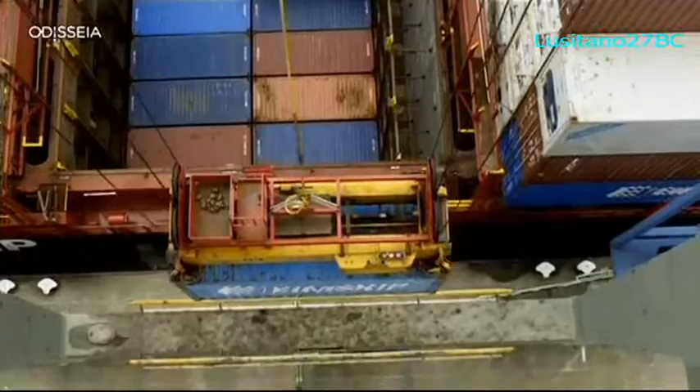Every day, tens of thousands of containers are unloaded in Europe's busiest ports. Millions of tons of freight, which will flood all over the continent. But the transport of all this cargo has always come up against an almost impassable barrier, situated in the very heart of Europe, the Alps.

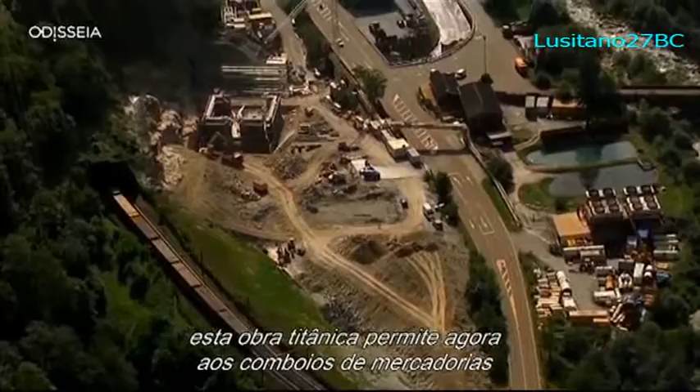An obstacle finally overcome thanks to the construction of a brand new rail tunnel some 57 kilometers long, the longest tunnel ever to be built in the world. Dug beneath the Gotthard Massif, this titanic miracle of engineering now allows freight trains to pass through the Alps at 160 kilometers per hour in barely 20 minutes. And passenger trains go even faster at 200 kilometers per hour. It's as if we demolished the Alps.

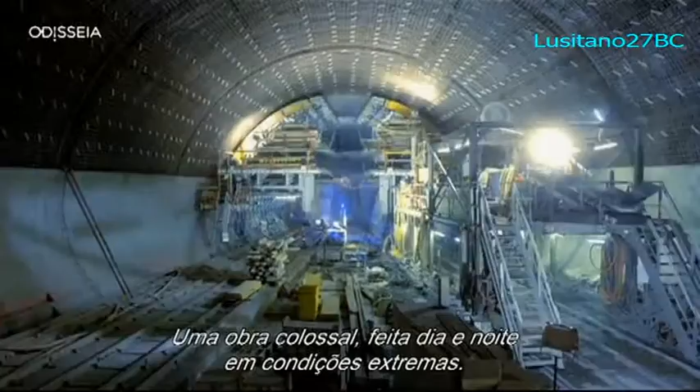Construction workers, engineers, surveyors. This enormous project mobilized 6,000 men and women for 20 years and required ultra-complex boring techniques. We had to attack 5 points at the same time. The Channel Tunnel is nothing next to this. A colossal task carried out 24/7 in extreme conditions. The rock gets very hot. When you touch it, it's at 50 degrees. We're going to tell you how man achieved this crazy dream of defeating the biggest natural barrier in Europe.

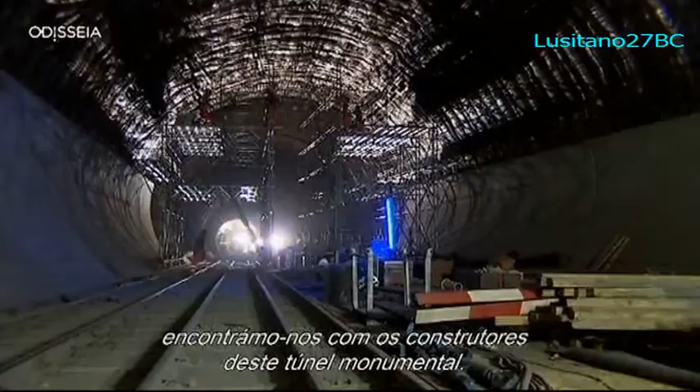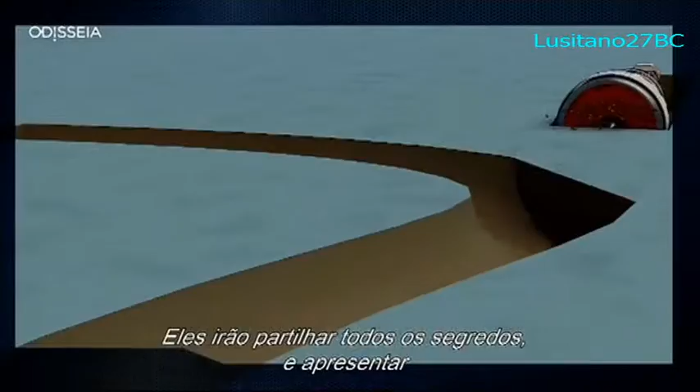This tunnel overcame countless challenges. To bring this exceptional adventure to life, we met those who constructed this monumental tunnel. Civil engineers like Davide Fabri and Werner Kradolfer. Head surveyor Adrien Rief. Head of all rail engineering Nicola Steinman. And the CEO of the main construction company, Renzo Simoni. They'll share all the secrets and present the ultra-modern means that were needed to achieve this incredible feat.

We'll also reveal the mind-boggling difficulties the engineers were faced with. At some points in the tunnel, we measured wind speeds of up to 350 kilometers per hour. Some of the terrifying incidents which threatened the site. How did we get out? We had to dig a lateral tunnel going backwards and using explosives. And the unrivaled safety measures which had to be deployed to prevent the dream from turning into a nightmare. There's a risk of derailing, especially at speeds of over 200 kilometers per hour.

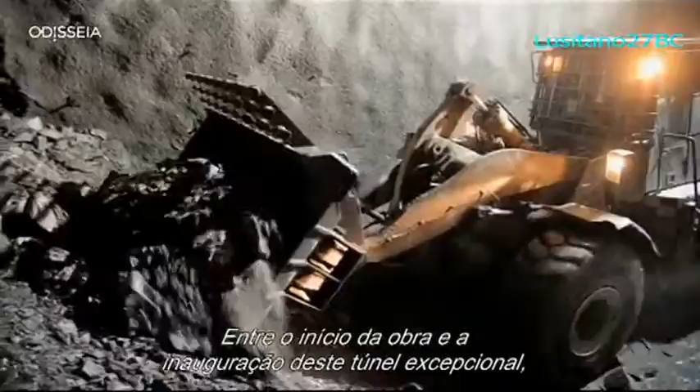Between the start of the work and the inauguration of this record-breaking tunnel, 20 years of hard labor were necessary to finally make history. Then we could finally announce it. We've done it. The 57-kilometer tunnel into the Alps has become a reality. You'll see how in the 21st century this outsized tunnel has changed one of the main trade routes of the old continent forever.

The Alps, Europe's highest mountain range, covering 60% of Switzerland. A natural barrier which for a long time held man back, until he had acquired the technology to break it. A symbol of our constant fight to tame nature, the Gotthard Massif, situated in the very heart of the Alps. Gotthard has always been a part of a Swiss legend. You can almost say Switzerland was born from this legend. But Gotthard was previously an obstacle and a source of danger. And over the centuries, we've managed to go over and under it by building transport links between north and south.

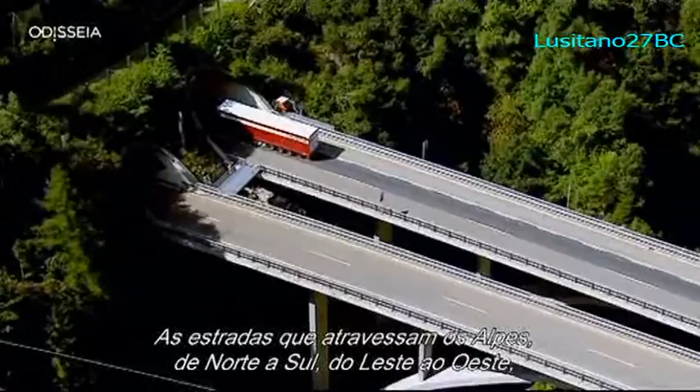The gradual development of the Massif with more and more modern infrastructures has always been crucial to Switzerland. The roads which crisscross the Alps north to south, east to west, are the country's economic arteries. With over 25 million tons of merchandise in transit every year, it's even one of the most frequented trade routes in Europe. Having thousands of trucks on their roads was pure hell for the Swiss. The ecosystem needed to be protected, and the Swiss simply had to find a solution.

The Swiss transport authorities established the policy of transferring truck-hauled freight to rail freight. To do that, existing rail network capacities needed to be increased. The aim of the policy was to protect alpine flora and fauna, but also the inhabitants, who were suffering from increasing noise and exhaust pollution.

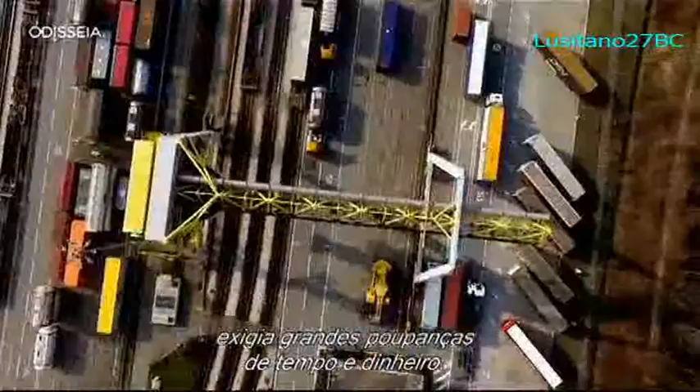But developing rail freight in favor of road freight was a huge gamble. To convince a hauler to unload his goods onto a freight car only to reload them farther down the line would require big savings in both time and money. A tunnel works for everything. Well, works for freight, also works for passengers. And they knew passenger transport would increase.

Switzerland's government already had the solution. In 1882, Swiss engineers had already bored a first rail tunnel under the Gotthard Massif. Lying at an altitude of over 1,100 meters and 15 kilometers long, it was the largest tunnel ever constructed. The first Gotthard rail tunnel broke all records back then.

Today, 15 kilometers is nothing. But this was the late 19th century, and it was dug with pickaxes and sweat. They used dynamite, recently invented by Nobel, so the Swiss used very recent, very innovative technology to bore the tunnel.

The tunnel started high up in the Massif and obliged trains to zigzag their way up at slow speeds. So the idea was, if the tunnel were bored at the base, it would be totally straight and ideal for high-speed trains. The project was titanic. The chosen line would require boring through 57 kilometers of rock, the equivalent of crossing Paris 3 times from east to west.

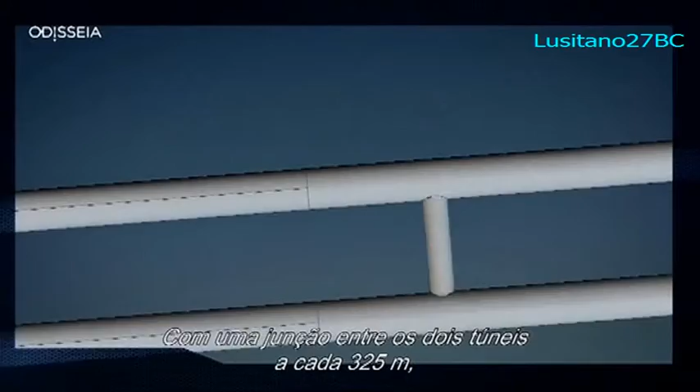This tunnel overcame countless challenges. It was an extraordinary sight and probably one of the most complex pieces of engineering in the world. Especially as the engineers soon realized there would need to be 2 tunnels, one for each direction. With the addition of a junction between the 2 tubes every 325 meters, a total of 152 kilometers would have to be dug.

If I had put the rail tracks in both directions in a single tunnel, I'd have had a tube much too wide to support such geological conditions at such a depth. The wider the tube, the more fragile it is. So the problems multiplied, starting with the risk of the structure caving in on itself. So we went for a project with 2 tubes, with a reduced width, to reduce the risks.

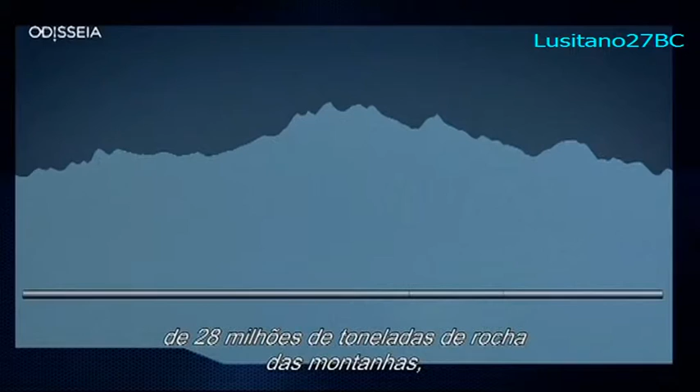Concretely, that would mean extracting 28 million tons of rock from the inside of the mountains, the equivalent of 5 great pyramids of Cheops. A figure that makes the head spin. And the second tunnel would be even harder to access, as it would pass at some 2,300 meters beneath the highest summit of the Massif. At any given moment, any given element can become extremely dangerous.

And as difficulties often come in pairs, the engineers knew that they couldn't bore in a straight line. Some zones had to be bypassed to avoid causing a disaster. You're passing through the Alps, so there's geological layer after geological layer, which is a real conundrum for the geologists and the engineer who wants to dig a tunnel there.

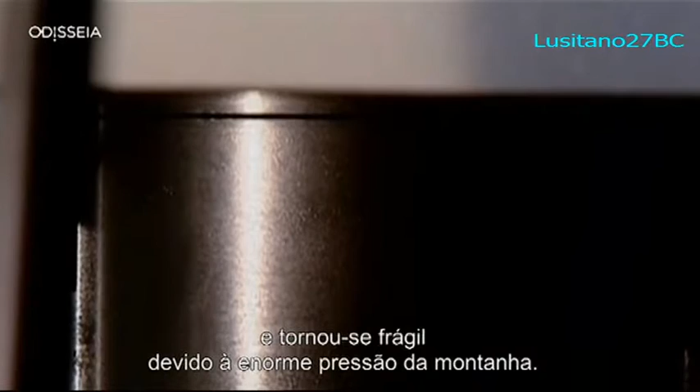There are some parts of the massif where the rock is homogeneous, hard and solid, and others which are much trickier, where the rock has been modified and made fragile by the huge pressure from the mountain. In those areas, it's flakier, less resistant, and sometimes even pulverized. The first question was, will we be able to probe? If so, what will we find? And will it be possible to bore through ground with so many layers?

Another difficulty was that the new tunnel would pass close to 3 hydroelectric dams. A nightmare for the technicians, when you know that water seepage is one of the worst dangers and could threaten the structure of a tunnel. We knew we had to be careful because the dams were above or adjacent to the route, and there would be subsidence. There was a risk of the dam giving way and causing a disaster. For absolute safety's sake, we took ultra-precise measurements over 15 years.

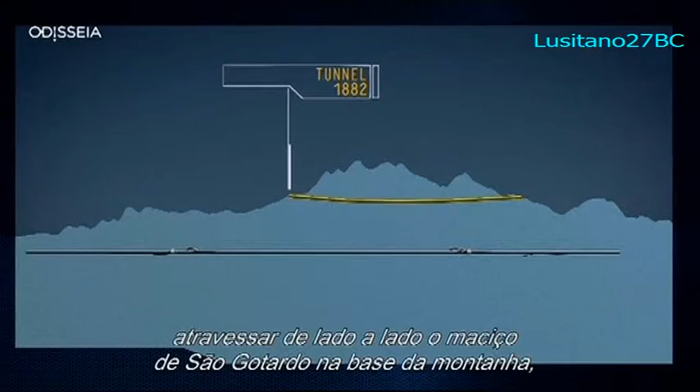Here's the tunnel constructed in 1882. Since the aim of the new tunnel was to cross the Gotthard Massif from one side to the other at the base of the mountain, it was named the Base Tunnel. Engineers, construction workers, surveyors, almost 6,000 men and women were mobilized every day on this mammoth site for 20 years.

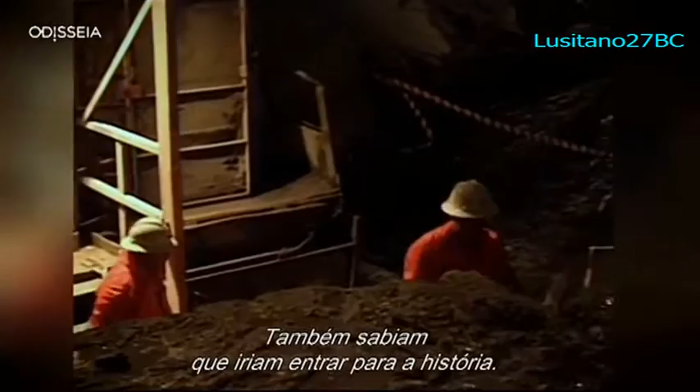Work began in 1996. Step 1, to dig an 800-meter deep access shaft to enable the laborers to work in both directions of the tunnel. From the outset, the whole team knew it would be a long-term job, that it would be extremely difficult, and that they were faced with a huge challenge. They were also aware that they would be writing a new page in history, but there would be lots of hard work first.

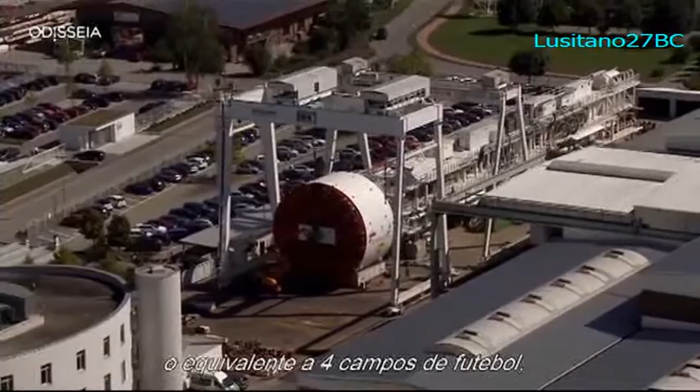An outsized project like this would require exceptional machines, specially designed to meet this incredible challenge. The job of this machine was to bore through the mountain. Over 450 meters long, the equivalent of 4 football fields, this huge state-of-the-art cylinder is a tunnel boring machine, or TBM. It's hard to imagine the power and weight of this amazing machine. It weighs 3,000 tons. It's monumental, gigantic, simply awesome.

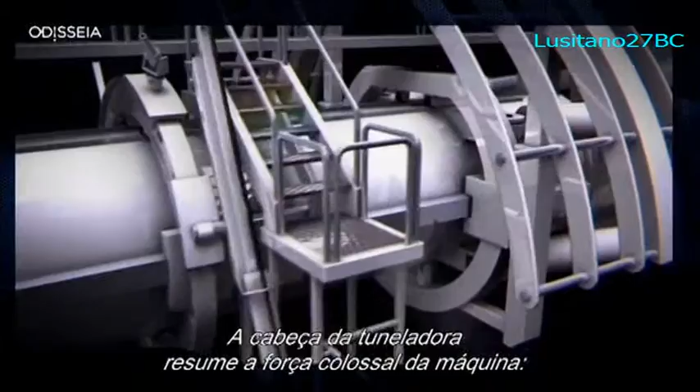The head alone sums up the colossal power of the machine. With a diameter of 9.5 meters, the equivalent of a 3-story building, it's equipped with 58 cutting wheels. Each of them exerts a pressure of 32 tons on the rock, gradually pulverizing it as it turns. The pieces of crushed rock which are extracted are called chips.

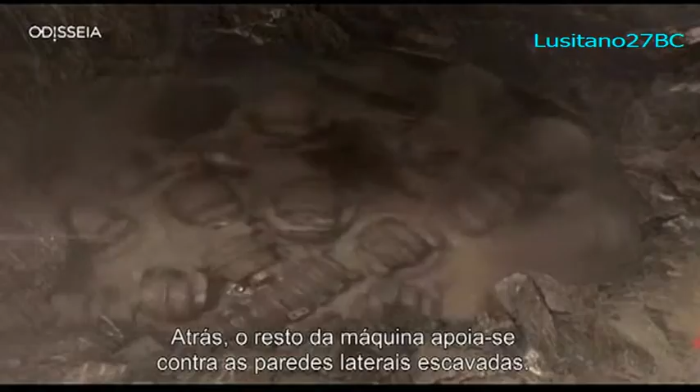The TBM has 2 parts. The head, with the cutting wheels that break up the rock as it bores through. And behind, the rest of the machine has grippers which push against the newly dug walls to provide very powerful forward thrust.

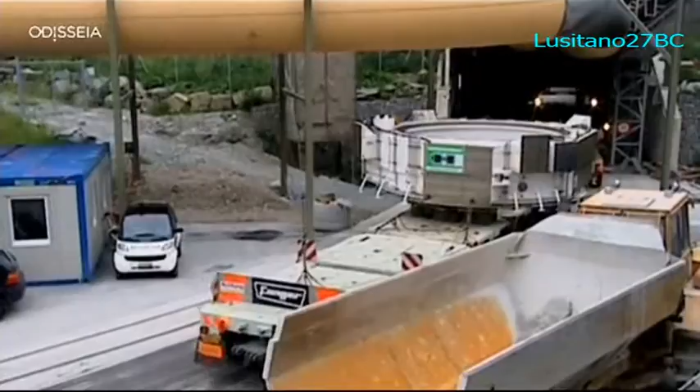This steel monster produces 42,000 kilowatts of power and can extract up to 6,000 tons of rock each day. It's not a new concept. A similar TBM was used to dig the Channel Tunnel, but it was the first time one had been used on such an extreme site. This time, the stakes were even higher. So to meet the deadlines, without going above the 10 billion euro budget, the engineers decided to use not one, but several TBMs.

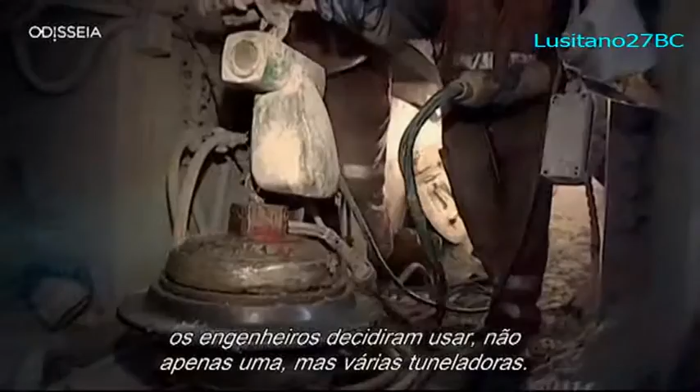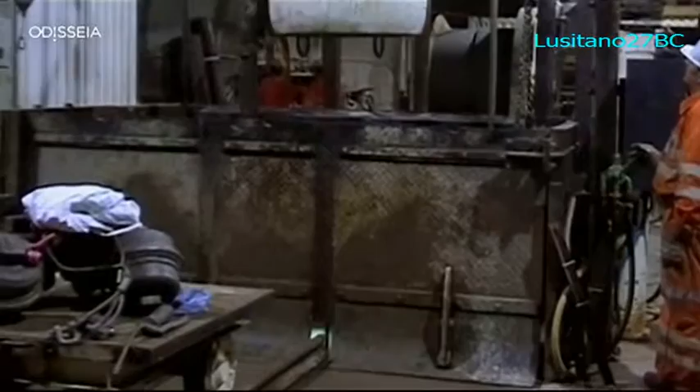To dig such a long tunnel with reasonable deadlines, we had to attack 5 points at the same time and via a shaft some 800 meters deep. There were 5 bids for tender won by 5 different consortiums. Each of them was attributed with a section where they had to work at the same time as the others. But by deciding to split up the tunneling work, the engineers simply multiplied the risks of breakdowns and thus delays. And as you'll soon see, despite the thousands of hours of simulations and calculations, hazards on such a site are inevitable.

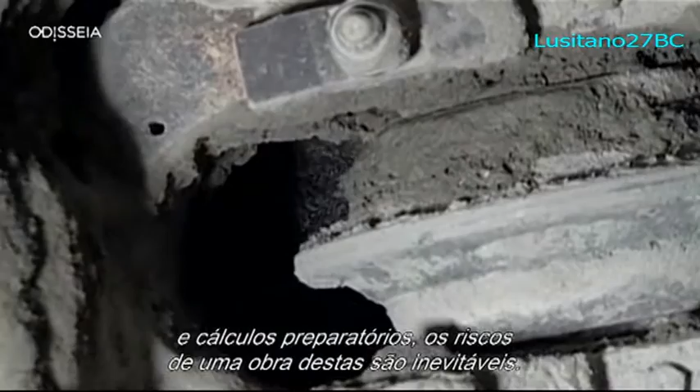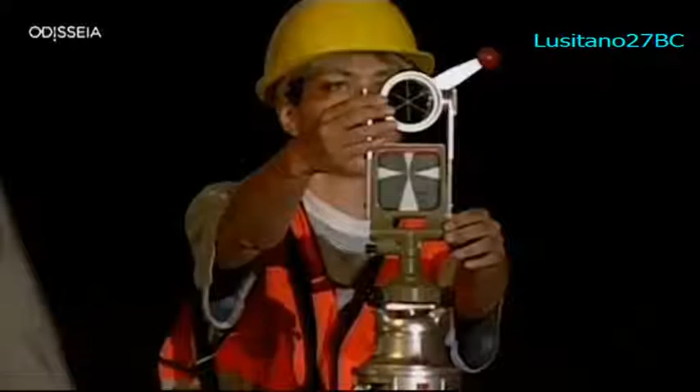Meanwhile, the consequence of this division of labor was the pressure placed on the shoulders of the surveyors. The role of the surveyors was vital. As the tunnel was attacked at several points, the 2 tubes needed to come together with absolute precision. The slightest error would have spelled disaster. We'd have done all that digging for nothing. So the surveyors stepped in with their measuring tools, mostly equipped with lasers, and took extremely precise measurements for the directions the TBMs needed to take.

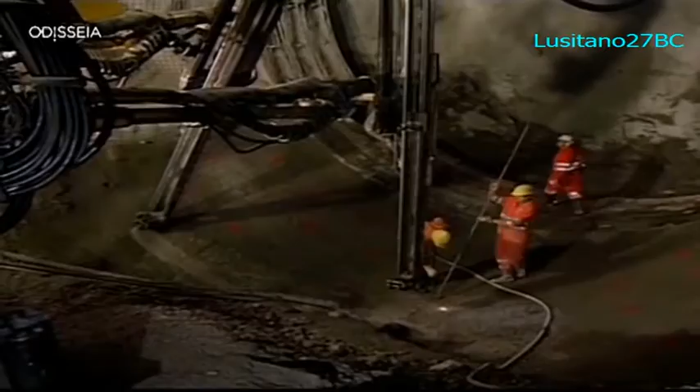The danger was very real. With each contractor working on its own section, how could the teams be certain that the 5 different stretches of the tunnel would be perfectly aligned at the end? The very slightest of offsets at the start of a stretch could result in a discrepancy of several meters at the other end. A disaster for such a huge project. So the surveyors were constantly on the alert. Their mission? To ensure that the route of the tunnel and the diameter of the borehole were strictly respected.

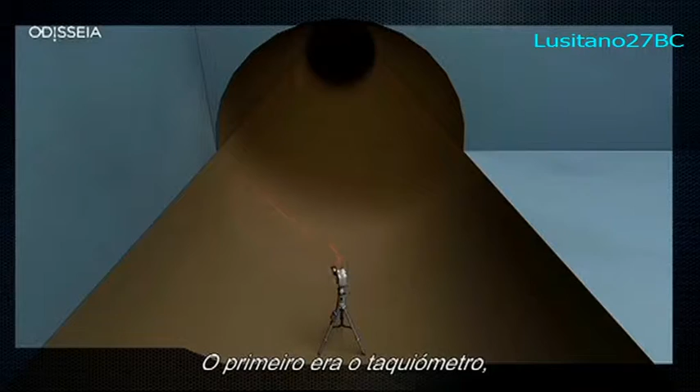The surveyors were equipped with 2 tools of formidable precision. The first was the tachymeter for measuring the angles and distances of the tube by projecting a laser beam onto the walls. There are 2 very important instruments, the tachymeter for long tunnels and the gyroscope. The particular thing about long tunnels is you must regularly check the trajectory and adjust it every time, and that's what the gyroscope's for. In expert hands, these 2 instruments would enable the surveyors not to exceed the accepted margin of error, a minuscule 25 centimeters, less than the height of a sheet of A4 paper, an amazing feat for a 57-kilometer-long tunnel.

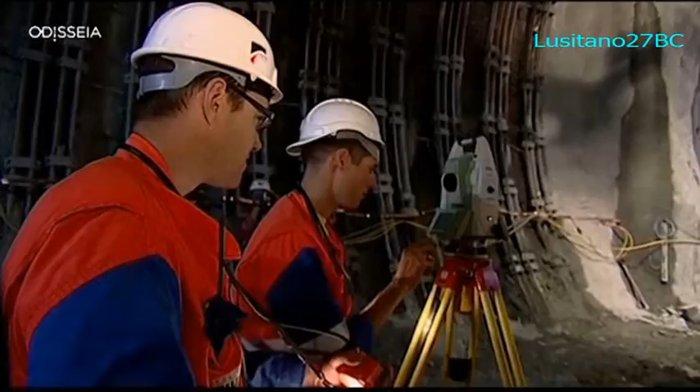But the borehole was far from being the only headache that the project designers had to overcome. The other major challenge of this record-breaking tunnel was the strength of the structure. And in this area, the risks are directly proportional to the huge scale of the project. Rule number 1 is, the moment you've finished boring a small section of tunnel, you immediately consolidate it so that it doesn't cave in. Back to the early 2000s, the tunnel was advancing rapidly. As the TBMs continued to bore their way through the mountain in 2 directions, workers specialized in tunnel consolidation stepped in.

To understand what was at stake during this next stage, you must bear in mind a simple principle: nature hates emptiness. Digging a cavity as deep as this, up to 2,300 meters deep, changes the balance of forces beneath the mountain. Rock tends to naturally cave in on itself to fill the void, the biggest fear of the engineers. We had to consolidate the walls and roof without reducing the diameter required for the passing of a high-speed train. That was the big challenge. We had to find the right balance between strength and effectiveness, because the tunnel is planned to last for at least a century.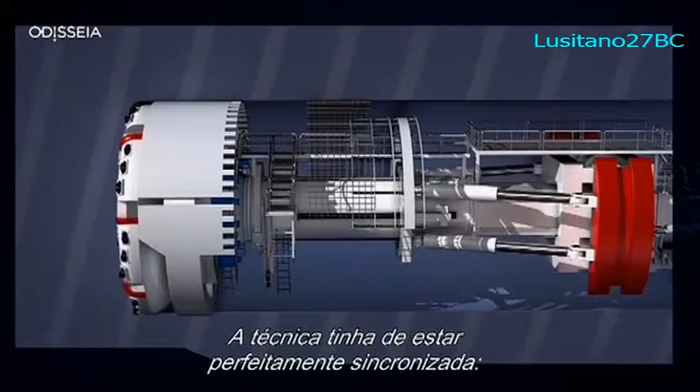The technique had to be perfectly synchronized. The consolidation of the walls and roof had to advance at the same speed as the boring of the gallery. This was true regarding the safety of the crews, of course, but also for that of the entire edifice. After boring, we had to cover the walls and roof with concrete to support the rock and prevent it from caving in on the TBM. We added anchors in the rock to prevent any cracked blocks from falling. The layer of concrete was reinforced with extra strong mesh, which serves to rigidify the ensemble. If needed, we would add extra, thicker, longer, and more resistant anchors.

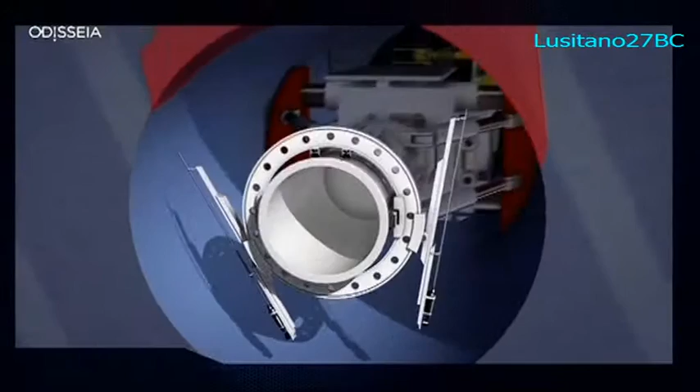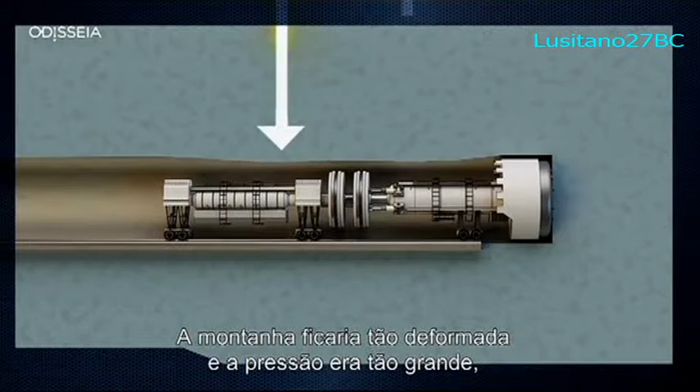The anchors are huge bolts screwed as deeply as possible into the rock. But at more critical points, where the pressure was particularly high, there weren't enough to guarantee the safety of the tunnel. The mountain was being deformed to such an extent, and the pressure was so strong that the underpinning alone wouldn't have provided enough resistance.

So the trick was to allow a small amount of pressure to exert itself so as to reduce its impact on the walls and roof. So the hull had to be able to deform slightly to absorb the pressure. That's the principle behind digging such a large tunnel. This huge length of suspended steel, it's known as a flexible girder. As its name suggests, it's designed to deform under the effects of strong pressure.

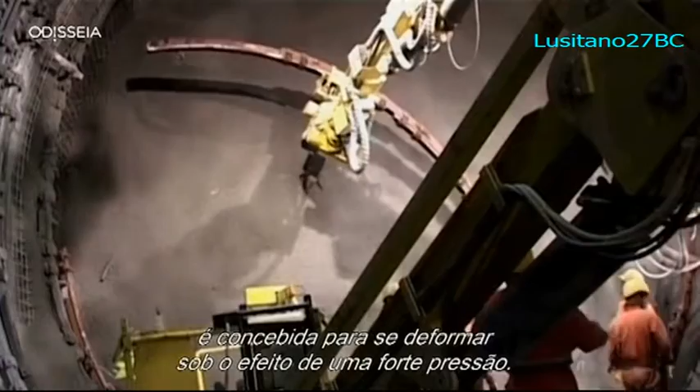The idea was to place thousands of them around the walls, roof and floor at places most threatened by strong pressure, by joining them together one after the other to create steel strapping for the tube. Once fixed together, the steel straps would slide to a stopping point. Then they began to slowly deform until we decided to block them at the stopping point. By blocking the deformation of the steel straps, we created resistance around the tube.

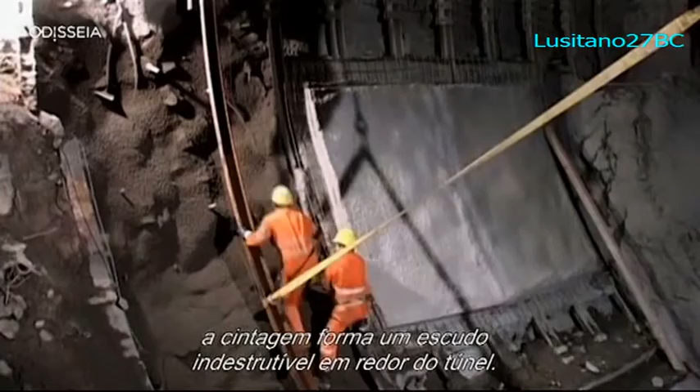The biggest difficulty was finding the right stopping point and then stabilizing the steel straps. And always bearing in mind that over-deformation would modify the profile of the tunnel, which could then prevent trains from getting through. Along with the hull and reinforced concrete, this strapping forms an indestructible shield around the tube. One major question remained. Where do you find hundreds of thousands of cubic meters of concrete needed to make the shield?

Remember that each of the 4 TBMs used on the site can extract up to 6,000 cubic meters of rock every day, the famous chips, which turned out to be providential material for the engineers. What do you do with 28 million tons of excavated rock? Imagine a 2-lane highway lined with concrete mixer trucks coming from the north of Europe down to the south, non-stop. Then they had a fantastic idea. They'd use a lot of the rock to make their own concrete for the tunnel surfaces.

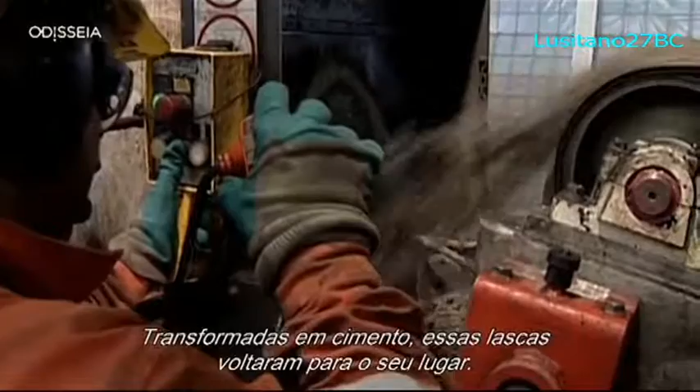In fact, the rock would serve as the base material for the production of the cement used in making reinforced concrete. That's why we installed giant crushing and grinding machines at the tunnel entrances. Once turned into cement, the chips returned to where they came from, deep inside the tunnel. Thanks to this ingenious technique, 40% of chips extracted from the gallery were recycled in order to make the walls and roof safe. The remaining 60% were dumped in old abandoned quarries. Several million cubic meters even made vacationers happy when it was used to build artificial islands at a Swiss lake resort.

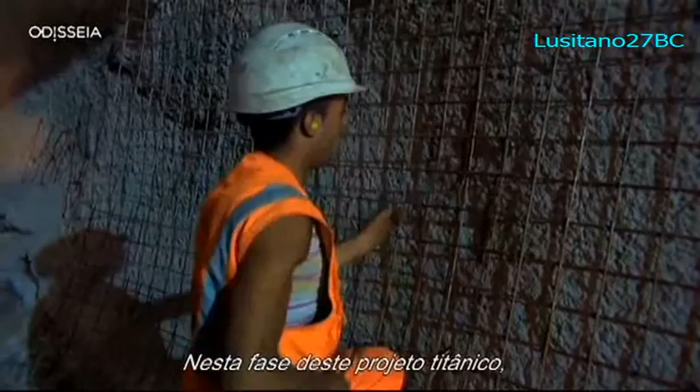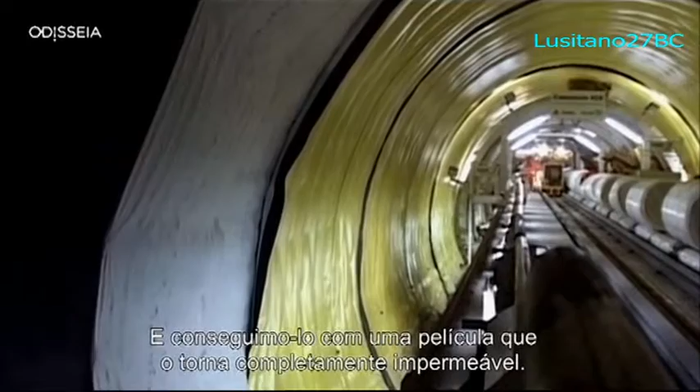At this stage of the titanic project, you might believe that the 2 57-kilometer-long tubes and their junctions were now completely out of danger. But that's without counting on one final threat, and probably the most dangerous of all, water seepage. Water is enemy number 1 in tunneling because it can cause so much damage, so it's absolutely vital to prevent water seeping into the tunnel. We needed to construct a totally waterproof tube, and we achieved this with a film that would coat the tube, making it completely waterproof.

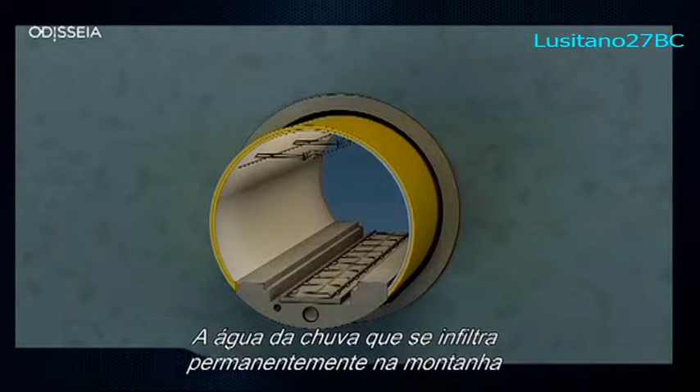The system is based on a plastic waterproof film that's only a few millimeters thick. We had a massive roll of the waterproof film, which we unrolled around the roof and walls, and then welded it together at certain predefined points. Here is an animation of this famous waterproof film. Rainwater that constantly seeps down through the mountain collects on either side of the tunnel walls. If nothing is done to prevent this, here's what might happen. The pressure would continue to grow until the tunnel explodes under its weight.

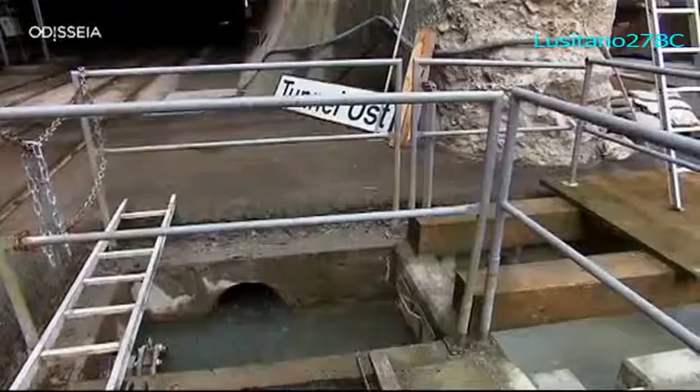The solution? To lay at the base of the tube drainage pipes to evacuate the water towards the outside. Drainage pipes were laid along the whole length of the tunnel floor to collect seepage and to gradually evacuate it to a central collector in the middle of each tube. This water is then redirected to the mouths of each tube. Once collected, the water is left to flow back into nature. The natural seepage of water down through the mountain would actually be the cause of one of the biggest material accidents of this extraordinary construction site.

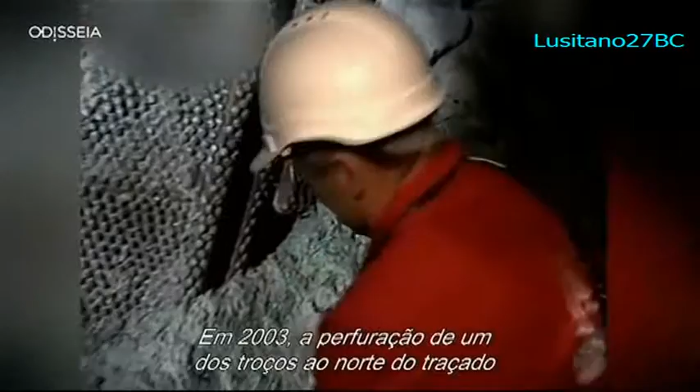Despite the number of probes carried out to test the quality of the rock, nasty surprises are inevitable over such a distance. In 2003, the boring of one of the stretches in the northern section brutally came to a halt. The TBM advanced into a zone of soft rock, which crumbled as the cutting wheel came into contact with it. The rock collapsed and totally buried the machine. Impossible to move it, impossible to reverse. Work could have been held up for months, years, or even been abandoned.

Over the centuries, water seepage from rain and melting snow had ended up totally damaging this vein of rock, which the probes had failed to detect. The amazing idea they came up with was to build a bypass tunnel so they could reach the machine from the other side. Once on the other side, we were able to clear the flakiest rock, consolidate the walls and roof, then free up the TBM so it could get on with its work.

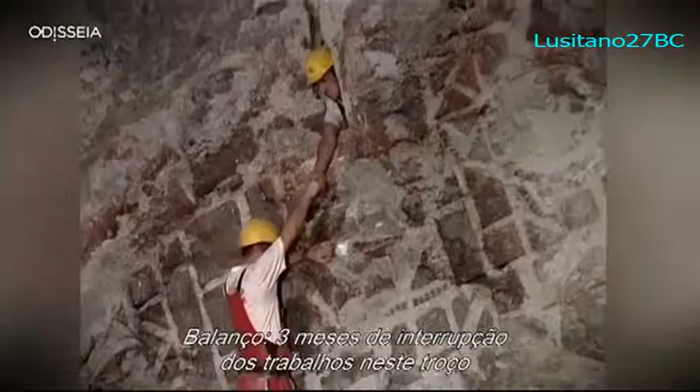It was science and technology against the elements, which are often really against you. The result? A 3-month interruption of work on this stretch at an extra cost of several million dollars. Incidents like that are a disaster for a construction site because you lose a lot of time. You risk not meeting the deadline, and it's very costly. Unforeseen incidents like this were testing and exhausting for the crews who were already working around the clock, 7 days a week, in particularly harsh conditions.

Contrary to preconceived ideas, the temperature is far from cool and far from constant under several thousand meters of rock. There's a very simple law of physics. When there's pressure, temperature rises. So when you're in the heart of the mountain with thousands and thousands of tons of rock pushing down from above you, the rock gets very hot. When you touch it, it's at 50 degrees. So one of the challenges we had to meet was to install a ventilation and cooling system to guarantee good air quality with temperature and humidity levels that were bearable.

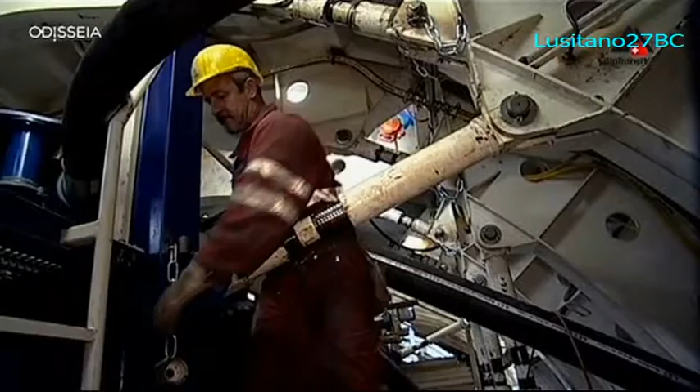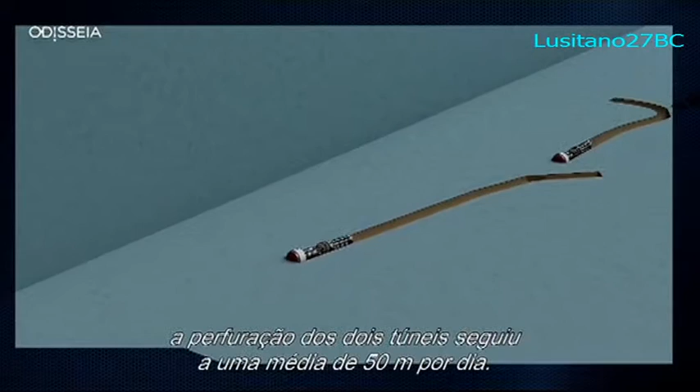On-site safety was a crucial point. The maximum temperature should not have risen above 28 degrees. And the levels of carbon monoxide and several other gases were constantly monitored. Thanks to all these technical and technological innovations, the boring of the two tubes continued at an average rate of 50 meters a day.

The construction site of the century, as it was called by the media, was about to enter its crucial stage. The 1,800 workers and technicians who had been boring through the mountain for 14 years would soon realize what kind of feat they had accomplished. The big day was set for October 15th, 2010. In a few moments, before the expecting eyes of the teams, the two eastern stretches are finally about to be joined. The whole gallery shakes. The TBM is close, when suddenly, it's done. The two sections have finally become a single tube.

An immense moment of pride and joy for the thousands of men and women who had been working for over 8 years deep in the entrails of the Gotthard Massif. They'd just written a new page in the history of mankind. It was incredibly emotional for the whole team. They felt they'd defeated the mountain. They'd been incredible, and they were experiencing something extraordinary, unforgettable. Huge emotions for all on the team, and a great victory for science and technology.

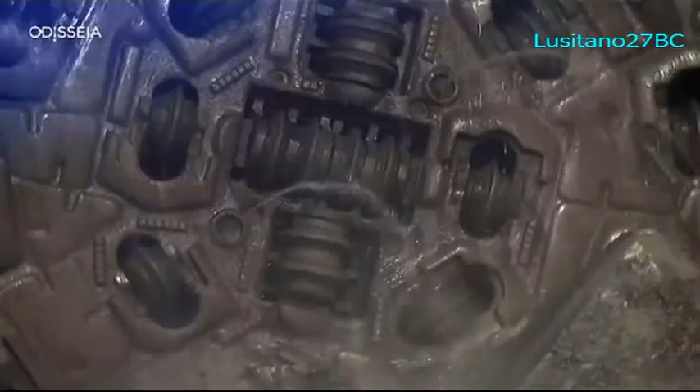5 months later, it was the turn of the western tube. Both rail traffic directions were now open. Then we could finally announce it. We've done it. The 57-kilometer tunnel under the Alps has become a reality. Construction workers, foremen, and engineers had all just accomplished a feat unprecedented anywhere on Earth. Remember, the accepted margin of error for each section was a tiny 25 centimeters. On arrival, the discrepancy was a mere 13.8 centimeters. A level of precision on such a mammoth work of engineering that's hard to believe.

But work was far from complete. Once the two tubes were joined, another challenge began. The aim of this project wasn't to drill some holes through a mountain just to prove it was possible. It was to build a railway and put it into service.

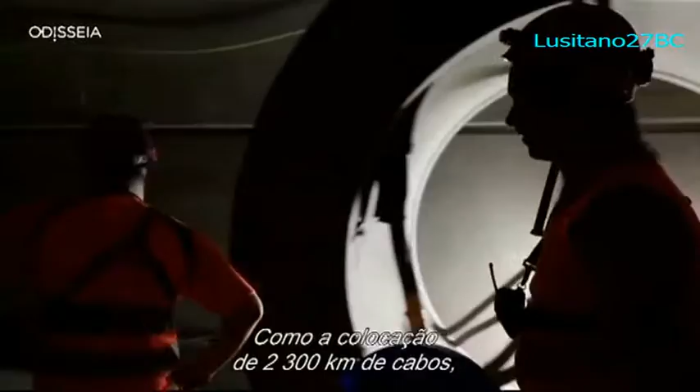While constructing a rail line in the open air seems like child's play, doing it inside a tunnel is a wholly different ballgame. And once again, the difficulties were directly proportional to the scale of the work. The longer the tunnel, the more expensive it is, and the greater the number of risks of malfunctions. And to make things even harder, the narrowness of the tubes also generated specific problems, such as laying 2,300 kilometers of cables, which equip the tunnel right into the heart of the mountain.

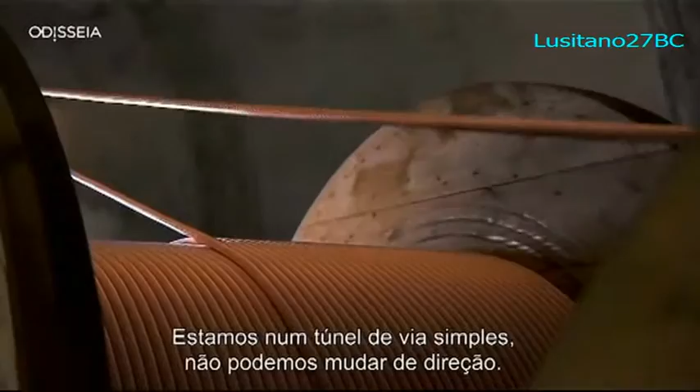We were in a single-track tunnel, so vehicles couldn't turn around to change direction. So we had to adapt the laying method. And the vehicles transporting the cables were fitted with cabs at both ends, so that they could switch and reverse in both directions. The laying of the track for the future trains also required a whole host of innovations, without which the project would never have been achievable.

Another major enemy in a tunnel is dust. Outdoors, the wind disperses it. But in a tunnel, you need to make sure there's as little dust as possible. Like water, dust gets in everywhere and acts like sandpaper on all the connections and fixtures that rub together, not to mention safety problems linked to the lack of visibility.

No one likes dust in their own home. It's the same in the Gotthard base tunnel, where we try to minimize dust. Ballast, the crushed stone laid between the tracks to bear the load of trains, produces a surprising amount of dust. So they had to find a solution for such a long tunnel.

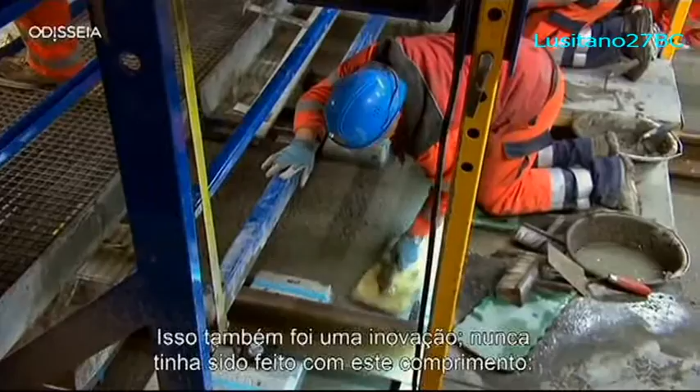The solution? To set the track on a huge concrete slab running the full length of each tube. A very tricky operation that required careful orchestration. This too was another innovation. It had never been done over such a length, replacing crushed stone with concrete.

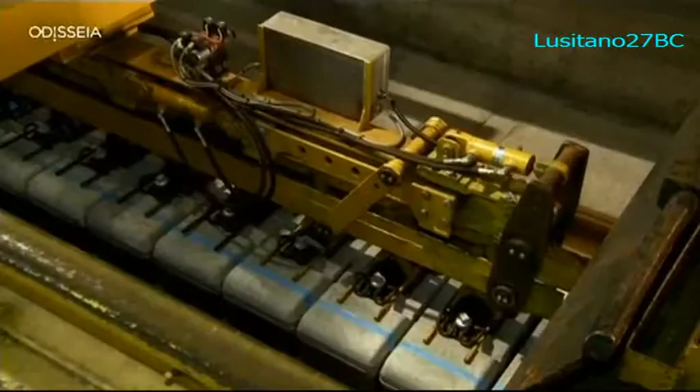Step 1. To lay, then weld 120-meter-long rails, advancing at over 2 kilometers a day. It's crucial to ensure the gauge between the rails remains constant, otherwise there's a risk of derailing, especially at speeds of over 200 kilometers per hour. These large concrete blocks that you see on the ground ensure the correct gauge is maintained. Once girdled by the concrete slab, they are completely unshiftable and guarantee the stability of the track.

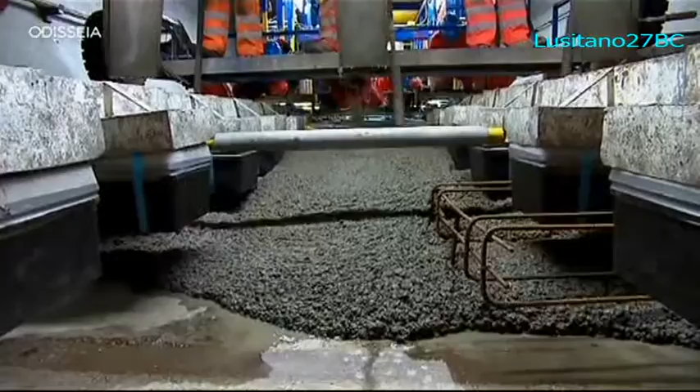Step 2 consisted in casting the slab. This is the most complex part of the operation. To be effective, the concrete must be totally homogeneous so as to form a single block, an amazing feat over 57 kilometers, achieved thanks to this machine.

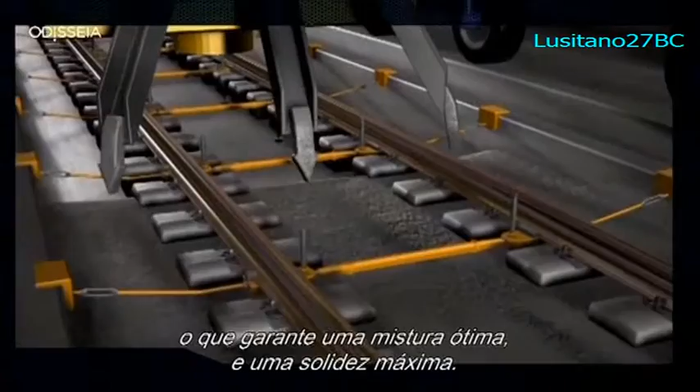Fed by a pump which supplies up to 5 cubic meters at a time, it can cast up to 200 meters a day. The concrete cast the day before didn't have time to dry before feeding in the concrete the next day, which ensured an ideal mix and maximum strength. This is all part of railway technology, and it's crucial as it allows the track to go into service.

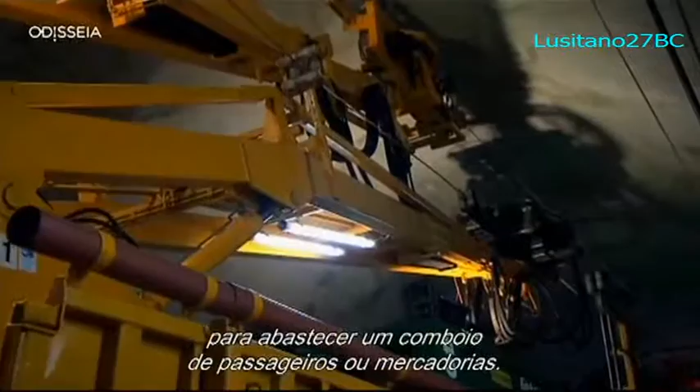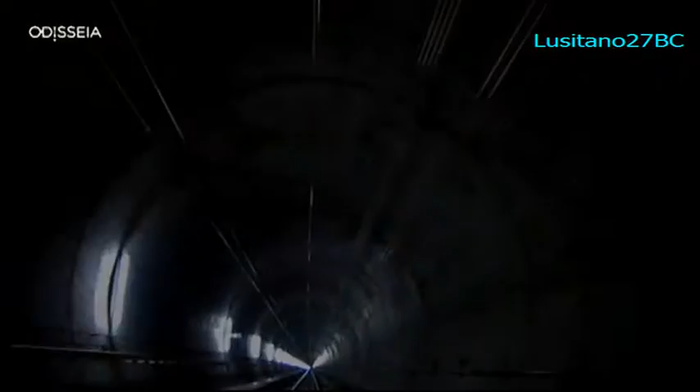You can't supply the tunnel through a single point, especially as it could malfunction. So you need supplies to be delivered at various different points. Because a power cut could have disastrous consequences, like blocking a line for several hours. To prevent this, the project designers built 5 mountainside power stations, the only way to avoid a power cut. A construction site as big as this consumes as much energy as an average-sized town. That meant they needed to build power stations specifically for the site.

While a power cut was the biggest fear of those running this vast site, it wasn't the worst disaster to threaten the tunnel. The biggest danger that threatens a tunnel as long as this, and it's a constant threat, is fire. Remember the Mont Blanc tunnel disaster? 39 people died simply due to a lack of ventilation. It's a constant threat.

Imagine what would happen if such a disaster struck a passenger train blocked beneath the Gotthard Massif, 20 or 30 kilometers from the nearest exit. Obviously, if we were unable to evacuate the passengers as quickly as possible, the results would be catastrophic. This terrifying scenario is the worst nightmare of the firemen posted at the 2 extremities of the tunnel. They're on red alert 24/7.

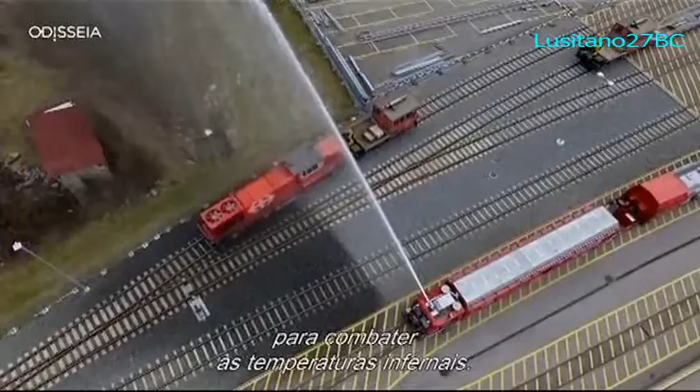To counter such an eventuality, the on-site firemen have state-of-the-art equipment, like this ultra-sophisticated train capable of resisting flames in order to save lives. It can project a wall of water in front of it to fight against infernal temperatures. Its thermal cameras allow the firemen to see in total darkness. And finally, the cabin is completely fireproof and gas-proof. If we firemen want to rescue people in danger, we have to consider our own safety also, our own protection.

But how do you fight your way through the flames to save hundreds of passengers trapped in such a long, narrow space? To find out, there's only one way: simulation. Imagine a suitcase catching fire on a train halfway through the tunnel. The train can't reverse, and the fire could grow to dramatic proportions before the train reaches the end of the tunnel. The only option is to reach one of the 2 intermediary stations specifically designed to counter such a danger. They're called multifunctional stations. Their presence in such a long and deep tunnel is a world first.

And in this multifunctional station, the train stops. The people are escaping themselves. They are going to the side of the multifunctional station, and then they walk on the other side to the other multifunctional station. In the other tube, a train traveling in the opposite direction has been warned. It's come to a halt, and is waiting for the passengers from the other train, who are all saved. But you need to be able to reach the other tube. Plus, in such a confined space, smoke spreads very quickly, and the risk of asphyxiation is very high. The passengers must imperatively get out of the tunnel in under 90 minutes.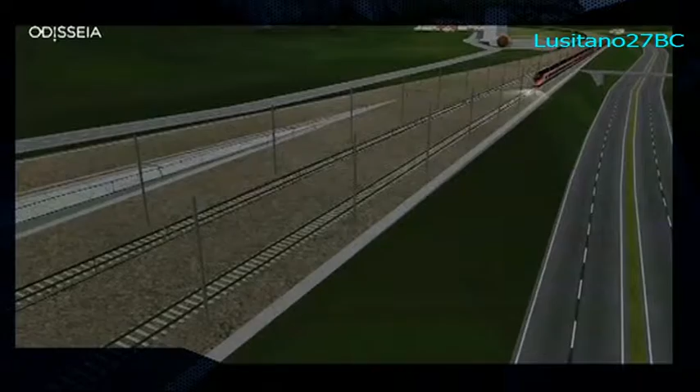These famous multifunctional stations house what could be called the lungs of the tunnel. The ventilation system has two functions. One, to supply oxygen to any people who are trapped, and two, in the case of a fire, to evacuate toxic fumes. The huge ventilators installed in the villages of Sedrun and Faido are the most powerful ever built. Each of them has 1.4 megawatt. So in total, we have roughly 15.6 megawatt of installed power for ventilation, and this is roughly 25 times a Formula One racing car, so this is really much.

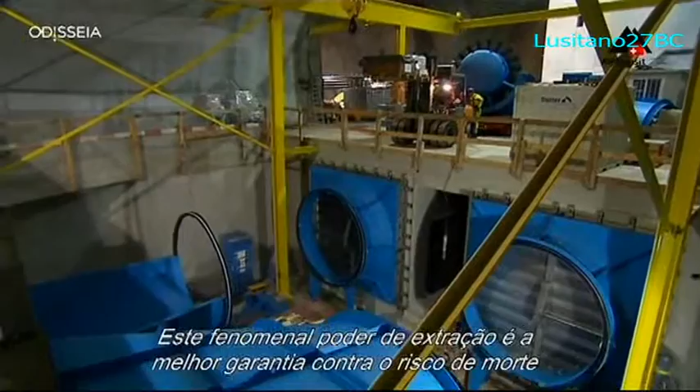This phenomenal power of extraction is the best guarantee against the deadly risk posed by the toxic fumes produced by a fire. We suck out the smoke above the train, out of the tunnel. We are talking about 200 cubic meters per second, roughly, which is pressed to the multifunctional stations. But the best way to fight against malfunctions and fire is, of course, to prevent them. And that means anticipation. That's why if the slightest anomaly is detected before a train enters the tunnel, it's imperative to be able to divert it at the last second.

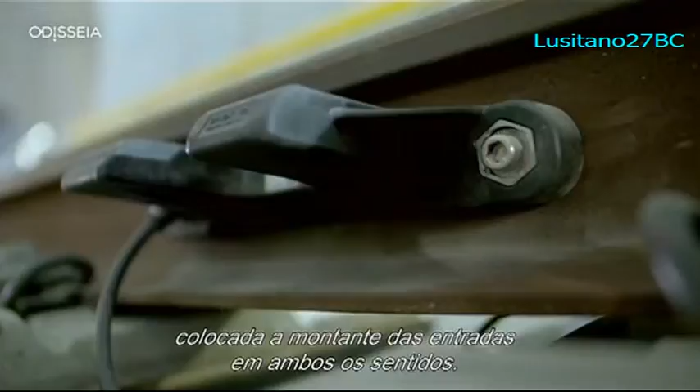We have implemented a so-called level entry and a tunnel entry control. If it fits, it is led into the tunnel. Otherwise, it will be redirected to go over the old mountain track, which is still existing. When a train enters the tunnel, our main concern is that it will come out the other end. So before it enters the tunnel, we check that everything on board is working, that there are no defective axles, etc. When an axle is defective, it heats up very quickly. The heat is then detected by what's known as a hot box, positioned upstream of the entrances in both directions. These hot boxes are linked to an entirely automated safety system developed by a French multinational.

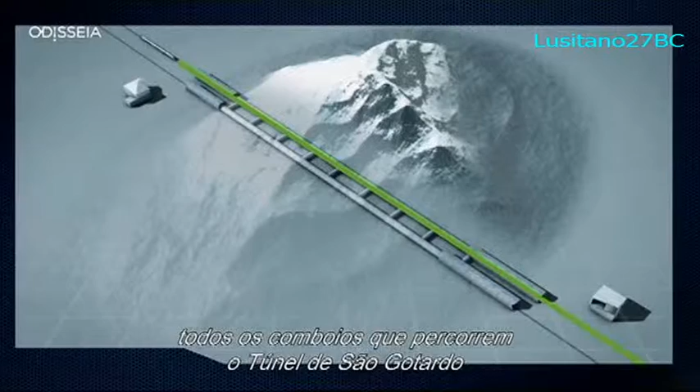Automation is essential to traveling at 200 kilometers per hour in such a narrow tube. To guarantee maximum safety, all trains that take the Gotthard Base Tunnel are equipped with ultra-modern technology called ETCS Level 2. This complicated name masks the most innovative train control system in the world. Here, signaling is no longer displayed on the outside, but inside, directly on the driver's dashboard.

When you're driving your car, you read signs through your windscreen. When traveling at 200 kilometers per hour, the train driver might not spot a signal, so the idea is simple. Signs are displayed directly on the dashboard. Drivers receive a speed reference which they must stick to, and they have no need to look outside of the cab. They could practically pull the curtains and drive with the instruments alone, a bit like with the automatic pilot on a plane.

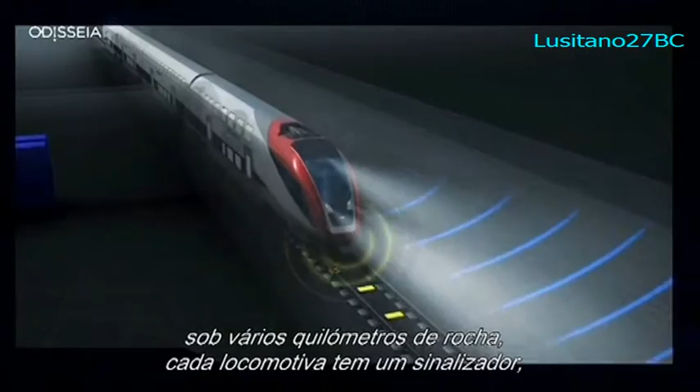The other interest in this cutting-edge technology is that it allows controllers to know exactly where the train is. As a GPS system doesn't work under several kilometers of rock, every locomotive is equipped with a beacon that transmits data from the rolling train to other beacons spread along the track. From time to time, the train is passing so-called balises, which you can see on the track, some yellow blocks, which are installed there, containing very detailed information about the positioning.

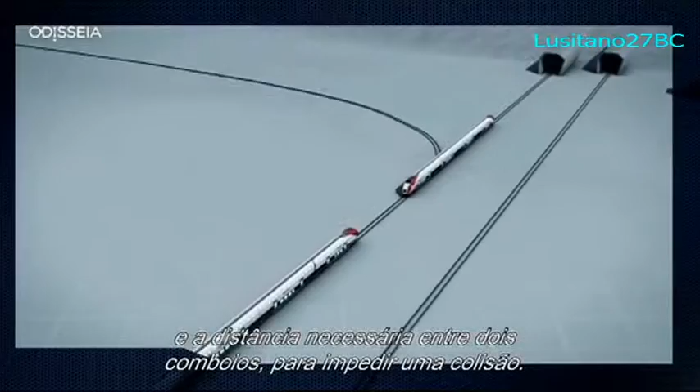The data gathered is immediately transmitted to a powerful software which analyzes it in real time. It's this software that determines, for example, the speed of the trains and the necessary distance between two trains in order to prevent a crash. A train weighs thousands of tons and takes a long time to stop. So you need to know the exact distance to impose between the trains and which trains travel at which speed.

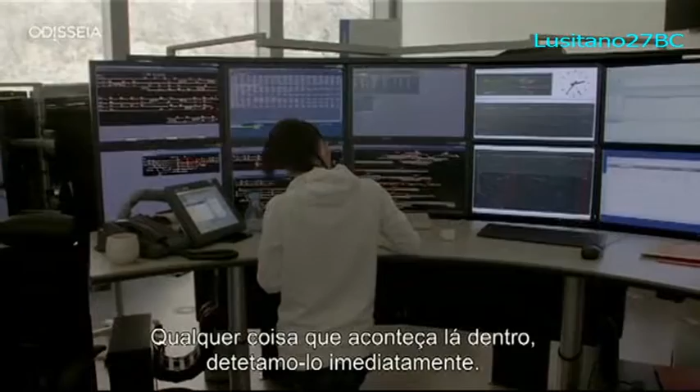It's here in this huge command post installed in the village of Pollegio that all this data is gathered. The center was specifically designed to control each millimeter of the tunnel. 50 people work in teams round the clock behind their screens, checking for the slightest anomaly. They're the guardian angels of Gotthard. We're the eyes of the tunnel, and this is our command post. Anything that happens inside, we detect it immediately. The slightest alert is quickly relayed, so it can be dealt with in record time.

There's a mechanical fault. Okay, I understand. So one's working, but not the other one. Okay, thanks for the info. What's going on? They've just noticed in the tunnel that one of the current converters is faulty. But although it's not working, the system is guaranteed to keep on functioning. Okay, so there's no overlap. That's right, no overlap. Overlap means the systematic backup of electrical current feeds and transmitters, just like in a modern airplane. It's the best way of reducing the risk of malfunctions.

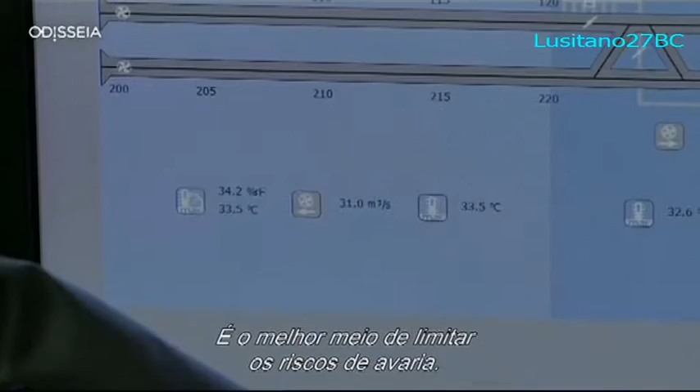The system is very effective for preventing accidents and incidents, but the command post still needs to react fast if there is one. At the moment, one of the converters is damaged, so the repair team has to intervene as quickly as possible. Because if the problem leads to another, some installations will have no electricity at all. Thanks to the overlap system and the reactivity of the teams, the safety of the trains is assured. For a gigantic engineering work like the Gotthard Base Tunnel, the designers must anticipate everything, even the most unlikely incident.

Imagine a total power cut blocking a train inside the tunnel. In such a case, traffic would immediately be stopped upstream of the tubes. All the other trains would be prevented from entering the tunnel to avoid crashing into the train at a standstill. In such a confined space, a scenario like this would undoubtedly result in the worst railway disaster of all time. In a tunnel like this one, an all-out power cut presents the greatest risk.

We hope it will never happen. If everything's working well, we don't really have much to do. But if a serious problem were to arise, involving passengers, we'd be faced with a huge challenge. But we've prepared for that, and we're ready to rise to the challenge if need be. Envisaging all possible scenarios, even the most unlikely, is therefore an obligation before inaugurating such a monumental tunnel.

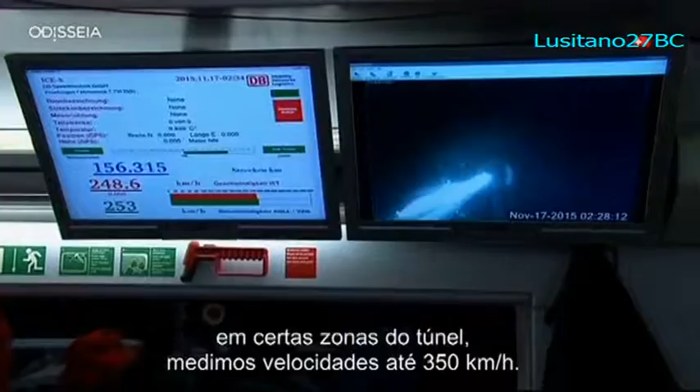At this speed, the risk of an accident increases because inside a tunnel, the faster a train goes, the more violently it displaces the air mass, which provokes winds so strong they're comparable to those of a tornado. We measured wind speeds around the train which were even faster than the train itself. For example, if a train was traveling at 250 kilometers per hour, at some points in the tunnel, we measured a wind speed of 350 kilometers per hour. Winds as violent as that could tear down all the overhead lines. Having verified that the structures were able to resist a train passing at 275 kilometers per hour, the engineers could be certain that there'd be no problems at only 200 kilometers per hour.

The Gotthard Base Tunnel is so long that the winds give rise to an extraordinary sound phenomenon. As a train moves through the tube, it acts like a piston of an organ. We were able to enter the tunnel on foot to give you an exclusive listen to the sound produced by a passing train.

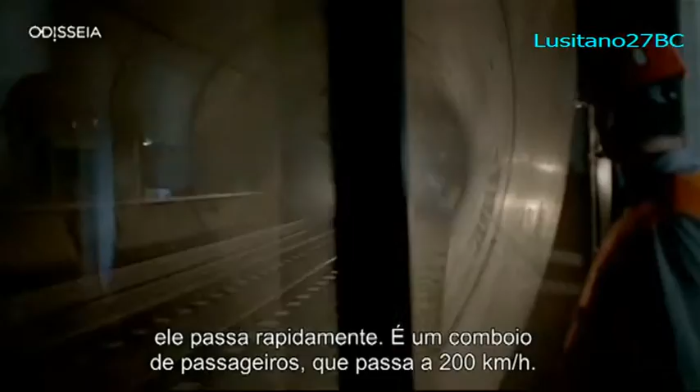The train is approaching now at high speed. It will pass very quickly. It's a passenger train that'll pass at 200 kilometers per hour, and you can hear that organ-like sound. We call it the Gotthard organ.

The passing of high-speed trains was also used to measure the changes in pressure passengers would experience inside the cars. It mustn't go above a level that could harm the human ear. We have to take into account the aerodynamic effects for passenger comfort reasons. We can't have any sharp variations in air pressure. Otherwise, it will affect their hearing and cause discomfort to their ears.

These tests were the last step before the tunnel entered service. They concluded 25 years of hard work after the decision to cross the Alps underground was taken. The dream of the 20th century engineers has finally come true. The longest tunnel ever constructed by man is about to enter into history.

When you enter the tunnel at 260 kilometers per hour and come out 15 minutes later, it can be snowing in the north and sunny in the south. That's when you realize it's as if we've demolished the Alps. We've created a rapid junction which will now be used for at least 100 years.

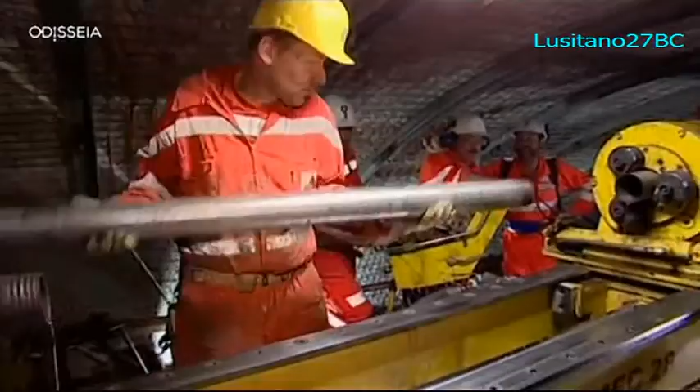From the start of the works in 1996 to its inauguration 20 years later, this insane project broke all records. An outsized performance made possible by the hard work of 6,000 determined men and women, aided by revolutionary machines. Without the huge TBMs, all the cutting-edge technology, all the skills and know-how united in this project, they would never have been able to meet the deadline for this 57-kilometer tunnel beneath the Alps.

It's a real feat. It's one of the safest tunnels in the world, because it's one of the most recent, and because it's an exceptional work of engineering. A work of engineering thought up and designed by enthusiasts, the professionals of underground construction sites, and railway engineers.

When you find yourself, as I did, 35 kilometers from the Northern Gate, with 2,350 meters of rock above your head, it's 35 degrees. You're all alone. It's as if you can feel the pulses of the mountain. It's a magical place and a unique moment, and one that you'll probably experience only once in your life.

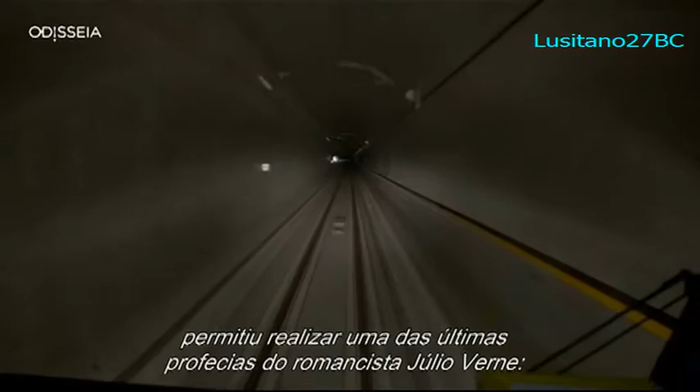We're now extremely proud to say to everyone, to all Europe, that we have succeeded in meeting a massive challenge and that this is a victory for everyone. In a way, the Gotthard Base Tunnel has made one of the prophecies of the French novelist Jules Verne come true. Man truly has journeyed to the center of the earth.